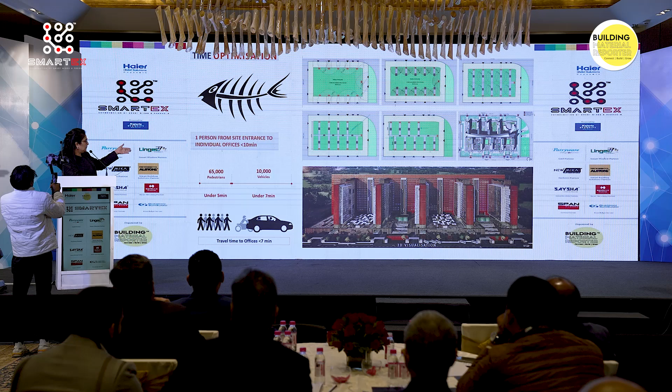So that same simple model was used, and the entire central spine was a public space. That's where everybody moves, which means all your vertical transportation, staircases other than the fire staircases mandated for distance, all public utilities, amenities, everything is down the central spine.

So that central spine, which looks quite thin in this drawing, actually at its thinnest point is 8 meters. It is averagely about 20 meters wide, so it's like an urban space. Just the scale of it makes it look this thin.

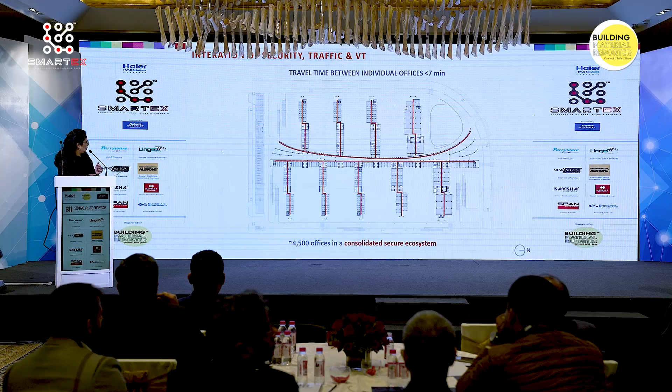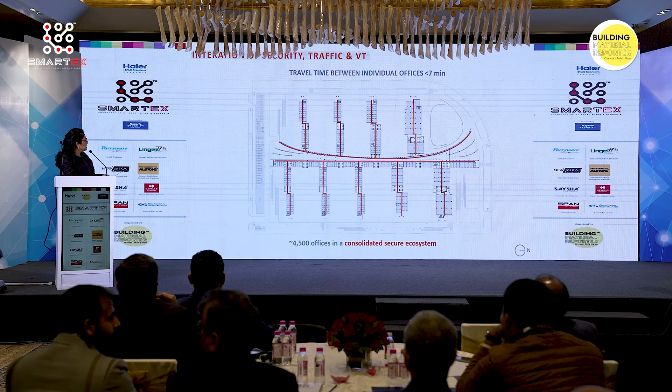So this is the main traffic movement that could happen, and as you can see, all of it leads to just the central spine. And travel time, of course it was simulated, is less than 7 minutes for anyone to get from an entrance to their office.

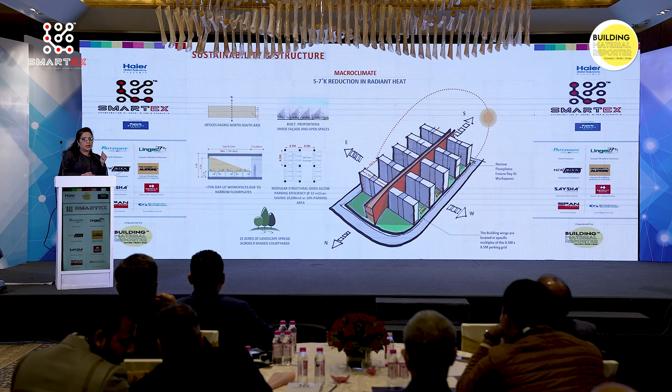Simple passive strategies that I don't need to speak to this audience about, they're all well aware - but it was important that the outside spaces be usable, because when we did the case study in Mumbai, we realized that a large amount of business, really large amount, takes place in a very random sort of way - takes place in parks, well, hardly parks actually, under trees in Mumbai, and on pavements where people exchange diamonds. You get one client who says, I need this, okay wait a minute, I'm going to go get it for you, make a few calls, get it from somebody on the road, and go exchange diamonds. So a lot of deals happen outside.

A lot of people who actually are not business owners but become day traders - so there's no allocation for such people. They will be there as part of this business, and they will be in the courtyards. So therefore, at least half the courtyards are shaded. Because we thought of the spine as an urban space, those parks, trees, gardens and benches where they meet had to be incorporated, obviously, in order for it to feel like an urban space.

And there is no air conditioning, it's all naturally ventilated. So you see these green lungs, using simple stack effect, and then the shaping led to a Venturi effect to escalate the amount of wind, just to make the space comfortable. So 100% of the circulation, which in a building of this scale is about 45%, I think, if I remember correctly.

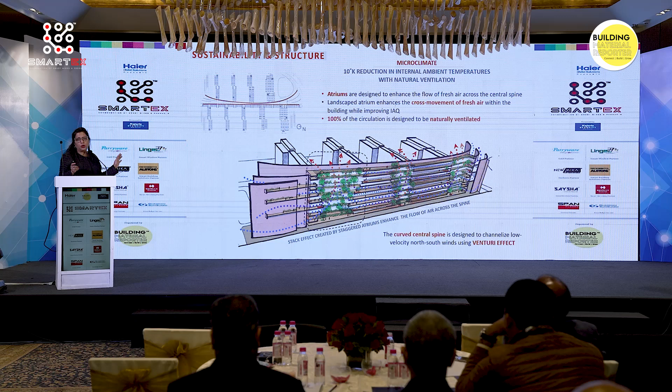So all of that is naturally ventilated. These are some of the sections showing the internal gardens where people hang around, meet and do trading. The green shows the courtyards, which is all on the ground floor level, and all the amenities are also on the ground floor level.

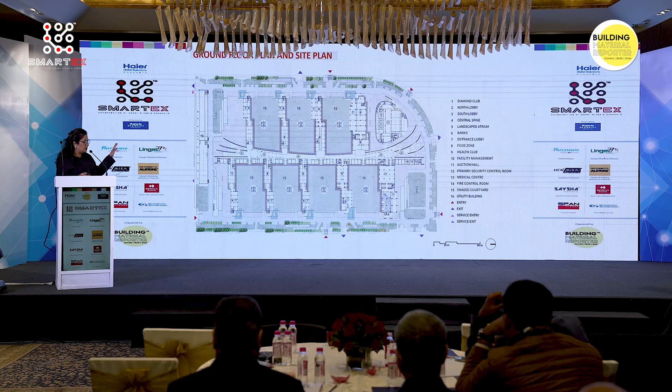So the dibba walas also come and deposit dibbas because food will still come from home, and that was an obvious understanding, knowing Gujaratis. There were other amenities on the ground floor, so that doing informal business is possible on the courtyards.

So the microclimate strategy was to reduce the ambient temperature by 5 to 7 degrees, and radiant cooling was used to do this. The entire space you see in the red spine is radiant cooled.

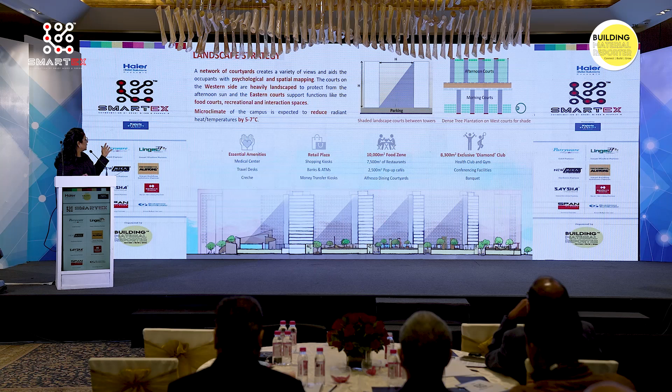So on the ground floor, as I was saying, there are medical centers, a travel desk, a creche. They also have their own customs facilities, security, couriering of diamonds - all of that goes on the ground floor. Then they have basic shopping, not for outsiders but for their own needs, along with banks, ATMs and money transfer facilities.

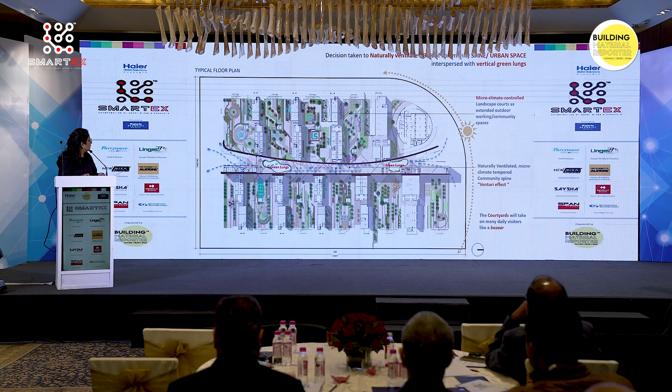So this talks about the entire solar shading, which I've already spoken about, the green lungs in the spine, and courtyards that will take on many daily visitors, somewhat like a bazaar, inspired by how they already work.

We'd been introduced to this radiant cooling system when we were working for Infosys about 10 years ago. They were trying to indigenize it, but it was still an imported system - of course a sustainable solution - but at the cost we had to finish this building, 4,200 rupees per square foot, all told, finished, complete, ready to move in, it was not going to be possible to have that system. So this was an indigenous system designed together with the engineering consultant.

What looked in the pictures like windows - actually none of them are windows. They are just fenestrations, inspired by our jalis, as most of us do in most of our buildings.

So when people are moving in that urban spine, there's actually through and through cross ventilation right through. All the holes are actually holes, they are not windows. I know because of the reflection or the sky through, it sometimes looks like there's glass, but there's no glass anywhere.

So in terms of client brief, whether it's a small or big committee member who owns that office, they all had one vote each, so therefore it's a level playing field. Offices had to be modular so that if somebody's business grows, they can expand. In fact, offices were assigned by a lottery system, because there's so much to learn from their ability to self-organize, and this was part of it.